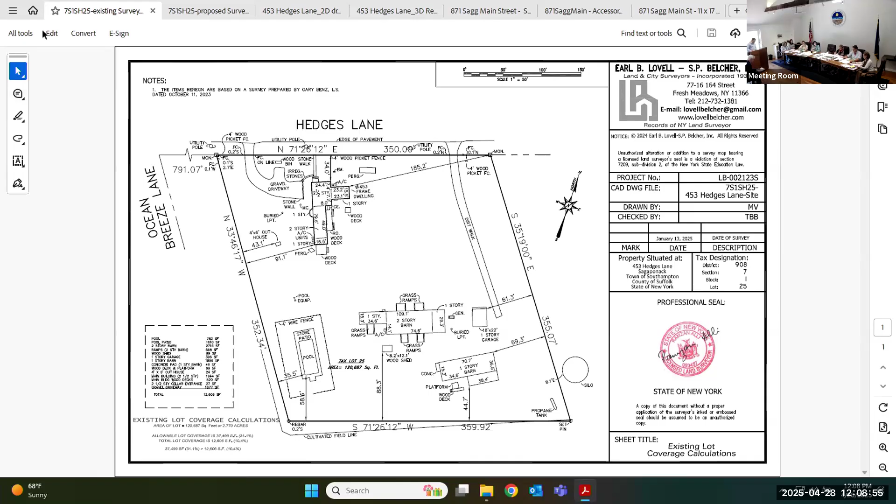Good afternoon, members of the board. My name is Robert Paxton, representing Brian Glasser. As Wayne had mentioned, it's unfortunate he couldn't make it. Brian had mentioned to just go over the lighting analysis from the renovated Greek Revival.

The existing window openings are to remain more or less in the existing structure. On the main house addition, the north front elevation is 15.8%, the south rear elevation is 15.3%, the east left side is 11.1%, and the west right side is 12%, resulting in a total average of 13.55%.

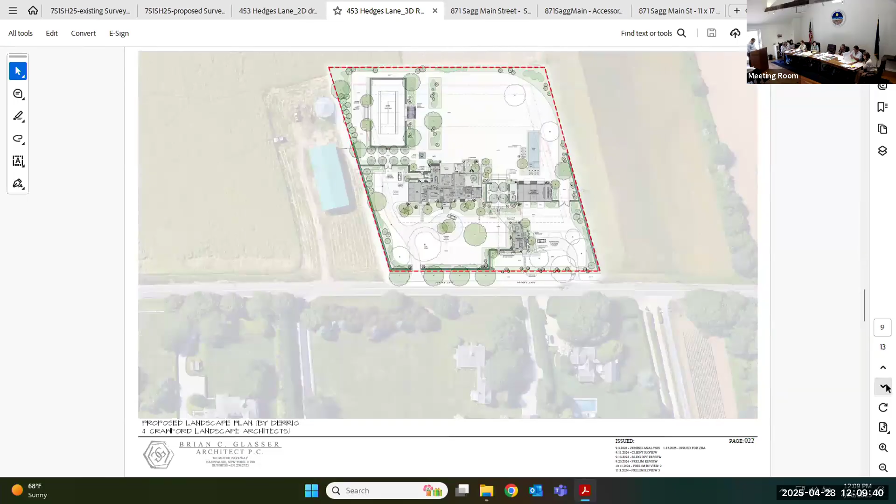On the renovated barn, the relocated barn, the north front elevation is 24%, the south rear elevation is 19.6%, the east left side elevation is 18.1%, and the west right side elevation is 20%, resulting in a total average of 20.43%.

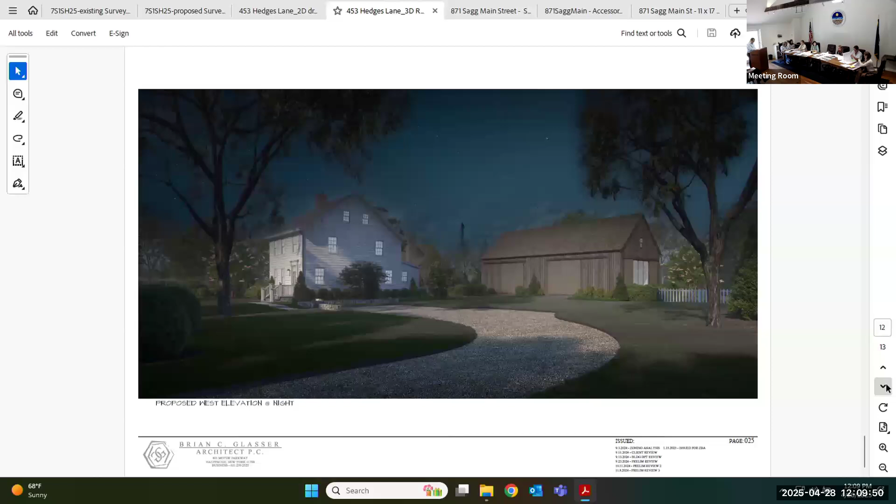And would that include when the barn doors are engaged, or is that maximum finish? That's maximum. Okay, thanks.

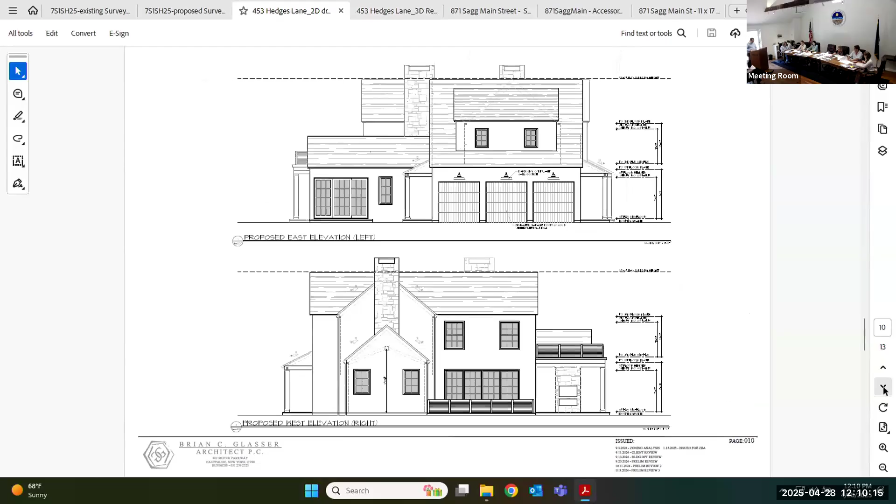Any other questions, madam? Sure. I'm looking at the plan, it looks like the tennis court is aligned with the new house, but when I look at this rendering, it looks off, at a weird angle. Am I crazy? I think the property line angle is sort of a rhomboid, so it's right, sort of the angle. Okay, so that is definitely the way it should look. Yes, great, okay.

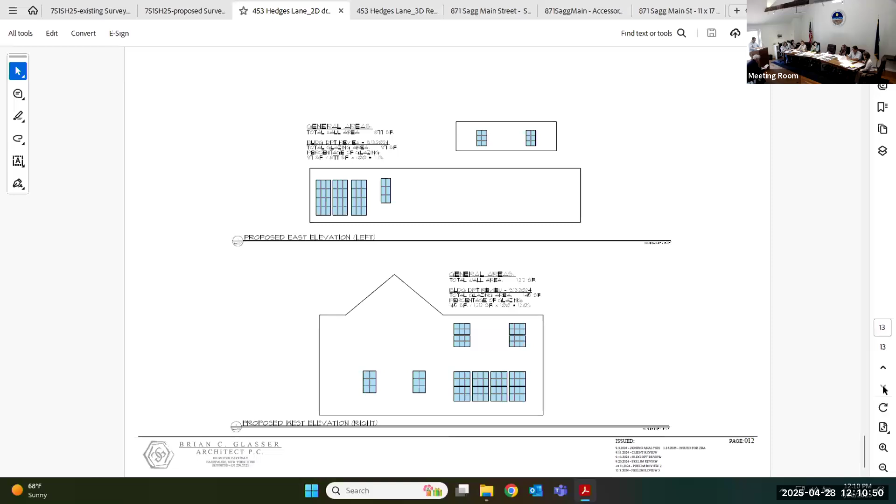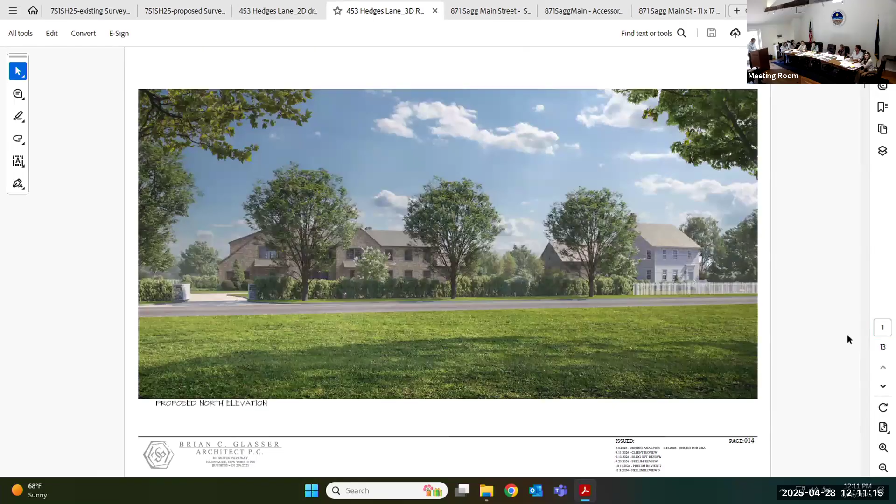Maybe you can summarize the materials for all the documents. So regarding the materials, on the existing Greek revival, there's a brick chimney to remain, pressure treated Alaskan yellow cedar roof, copper gutters and leaders, painted white clapboard to replace the existing, and Marvin Ultimate windows, which will be white. On the existing barn, the pressure treated Alaskan yellow cedar roof, lead coated copper gutters and leaders, board and batten siding to match existing, and Marvin Ultimate windows in suede, which is the color shown on top.

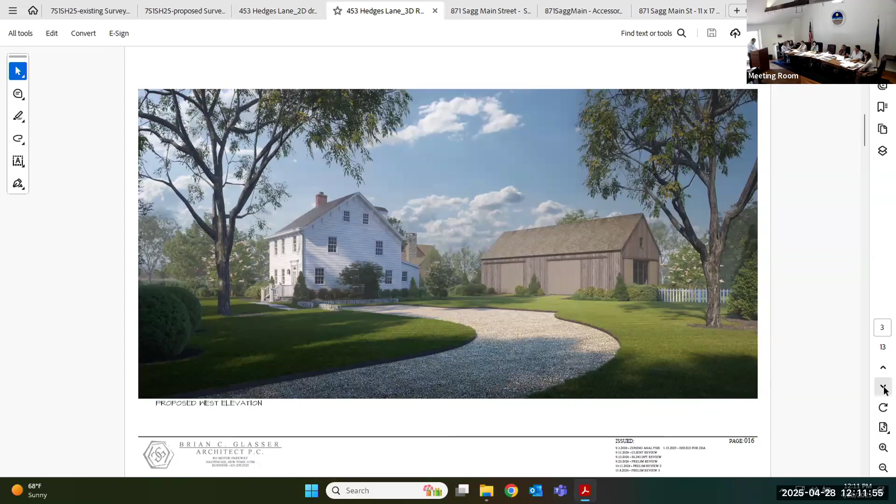On the proposed main house, the addition to the Greek revival, the roof will be pressure treated taper sawn Alaskan yellow cedar with 5.5-inch exposure. The gutters and leaders will be round and half round lead coated copper. Siding will be R&R shingles, Alaskan yellow, 6-inch exposure. The chimney will be Connecticut fieldstone, square and rectangle pattern, with lead coated copper flashing. The windows will be Marvin Ultimate suede, double hung, simulated divided light 6/6.

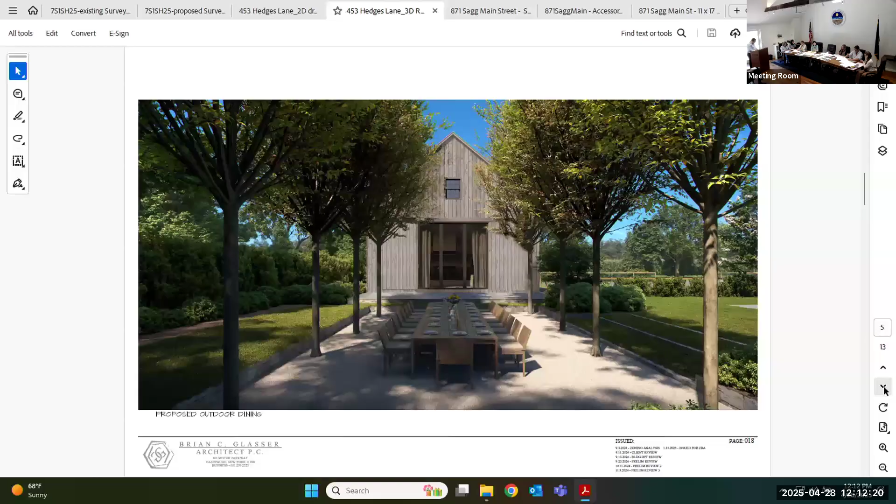The trim will be Alaskan yellow cedar left natural. The columns will be Alaskan yellow cedar left natural as well. The patio will be blue stone with stone risers. The railings will be Ipe, no posts, solid top and rail, with stainless steel cables. The wall sconces will be dark sky compliant. Any questions regarding the materials?

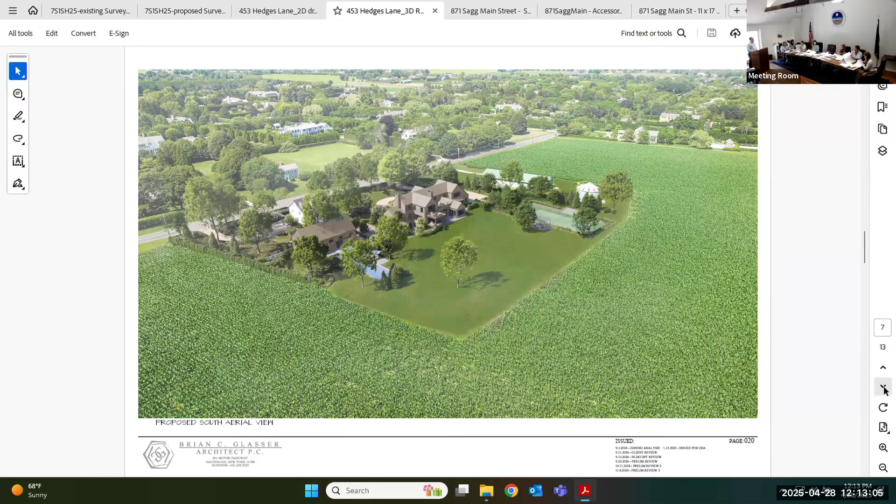Is this basically zero deviation from the last iteration we saw before ZBA? It's the same date, January 13th, right? That's the date on the front. Yeah, they're all dated the same. Yes.

I think it's great. I appreciate you guys taking a collaborative effort with us before ZBA and everything.

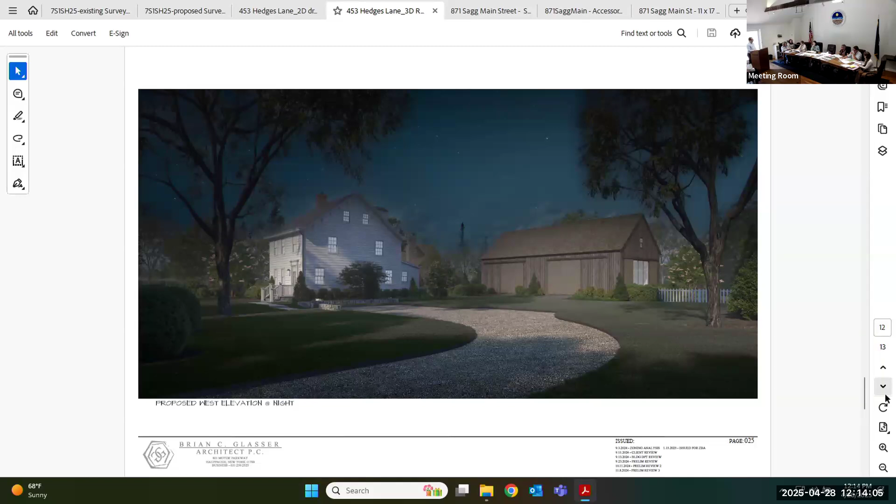What was the last date that we saw this? I believe January 27th. Was that before or after ZBA? ZBA came after, because this says it was issued for ZBA. Right, but they came to you for support before, and then went to ZBA. So we haven't seen it since ZBA. Right, this is your first time seeing it. This is the set that was done for ZBA. Yeah, after your meeting we had to have a public hearing, the whole nine yards.

We got our decision on April 11th. Okay, it started approximately a year ago. We're between that and Sagg Main Street with the same architect.

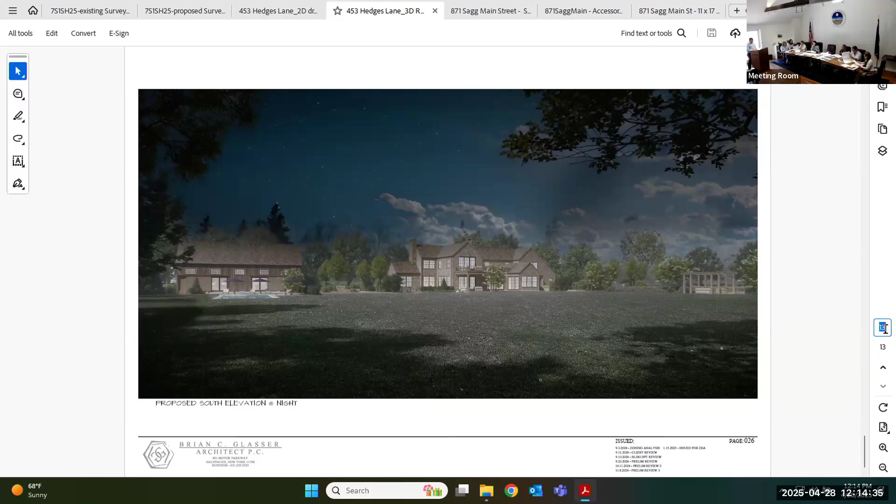I see no problem with it. Recognize it for what we worked on before. Yeah, we did a lot of work to get to this positioning, and to give Megan credit, one of her big ideas got us to this place, and I think it's great, I really think it's beautiful. Thank you. Sounds like a good time to make a motion to vote. Yeah, okay, we have a motion to vote. Second. Okay, approved. Aye. Aye. Thank you. Aye.

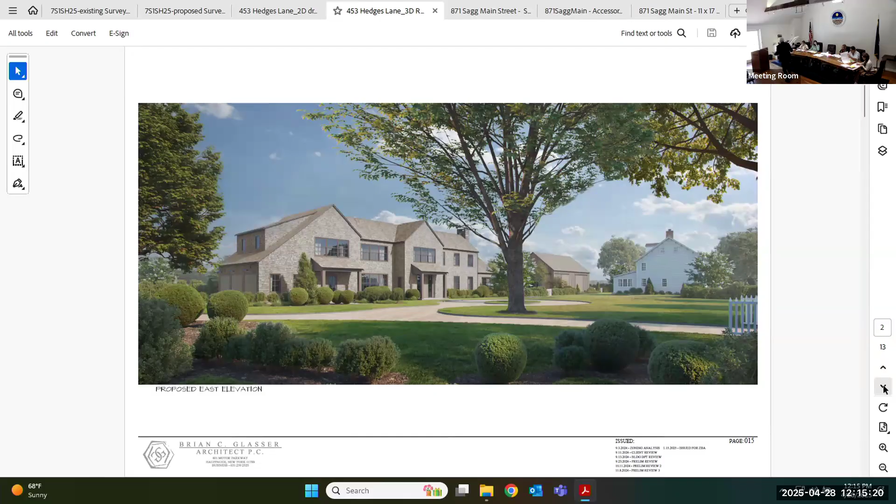Yeah. Yeah. Thank you.

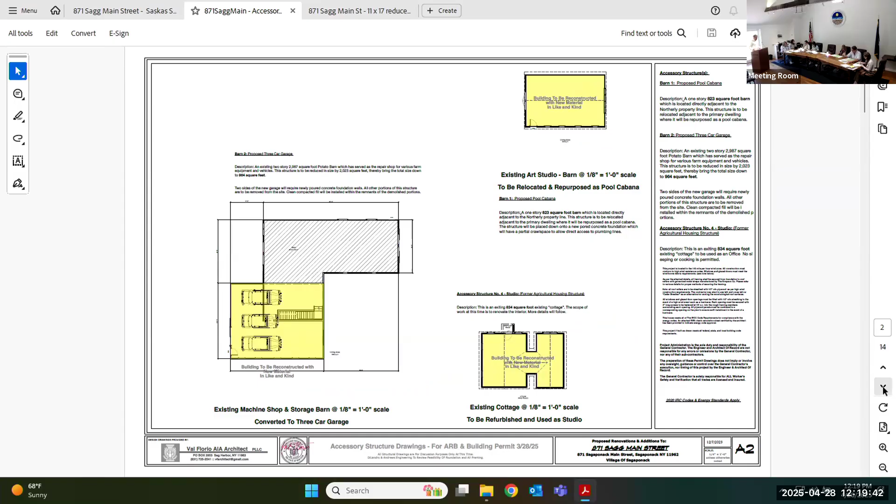The third structure we're asking for is known as the agricultural housing building, labeled number 4, and you're allowed to keep that to be repurposed as an office. It's not a working office, just an office. This is a large family with 6 adult children, and this will serve as a quiet study or a place to work. But this structure does not sit on a full waterproof basement.

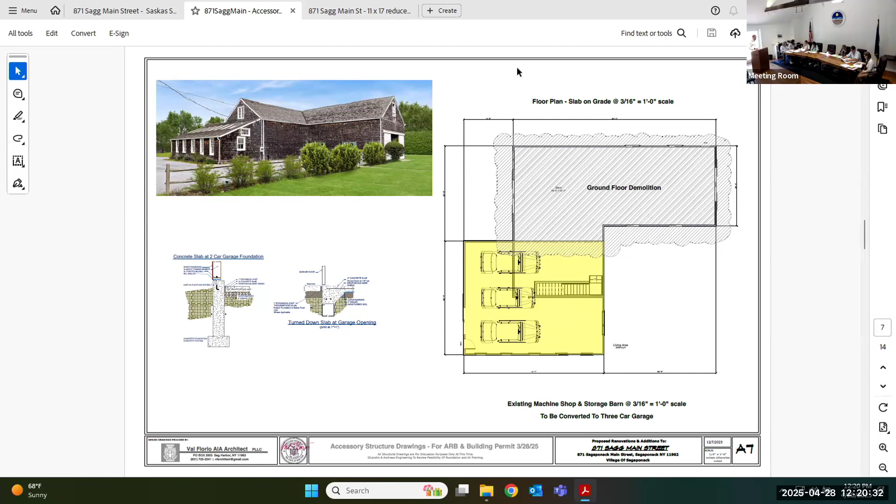The problem with it is not so much the integrity of the wood, but there's mold, and mold is a serious issue in terms of living space. Buildings 1 and 2 are not living space. The pool cabana, yes, you'll be inside. Building 2 is a garage. But building 4, just for health, safety, and welfare of the occupant—mold is highly toxic, and it affects a small percentage of the population.

Not that the board needs to hear this, but I'm thinking of health, safety, and welfare for my client. Eve has respiratory issues where she cannot be in a building with mold, and there are some people so sensitive that even paint can set off a respiratory issue. I've had this before, oddly enough, in Sagaponack. We had a house that was painted and the client was allergic to the chemicals within the paint, so Benjamin Moore sent out scientists to look at it. I hate to digress.

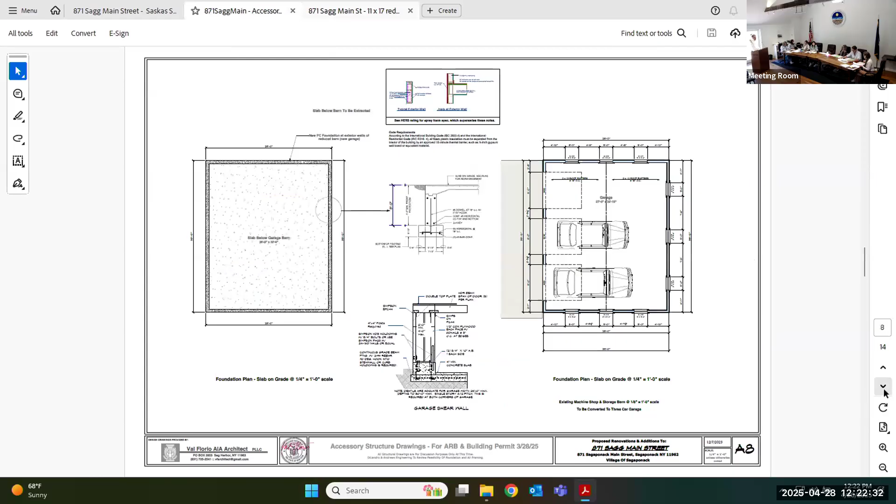Again, I'm coming to you to say everything we're doing would be exactly as approved. Each building, as you thumb through, is a photograph. I've documented the heights, the exact window locations. Nothing being presented today is different than what had been approved, with the exception of the office structure, which is A11 -- the windows within that building were retrofitted.

Wait, the office being number 4? Yes, and it's on this slide in front of us. I don't have any 11. Yeah, I abbreviated the set, so if you would, I'd invite you to look at page 7 -- it's A7, almost the last page.

What this structure is -- you can see the larger of the two peak roofs. There was a shed that must have been dragged to the back at some point and then just connected. The shed doesn't sit on a foundation, it's on a slab. And these windows, which you see here, have no divisions, which is inconsistent with a historically correct house of this period. A lot of these structures were built circa -- the main house is 1905.

This agricultural building was not too long after. If the board is aware, this is a working farm and it's adjacent to one of the oldest farms in Sagaponack that dates back to the 1600s.

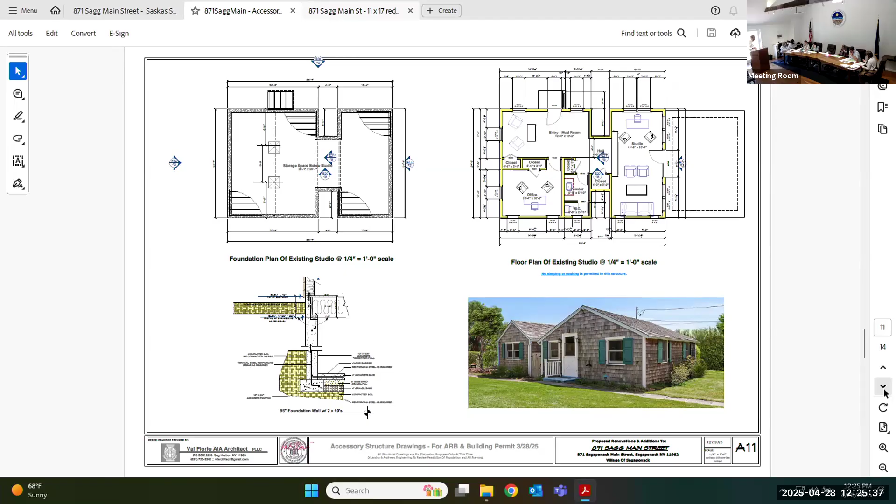So that's the story in terms of the three buildings, and no changes from the approval which this board granted. An unfortunate issue, I'm sorry. And I appreciate you're trying to do exactly the same because it's so perfect the way that it is.

So thank you. Thank you, Megan.

Would the -- as far as recreating these in exact like kind, from our standpoint aesthetically it looks the same, but John, would these have to be condemned in order to rebuild them? No, what I can tell you is that the garage section, the barn, cannot be turned into what we approve. The structure is too compromised, too cobbled together -- it simply can't be done without doing it over. The mold issue, I have not seen in the back building, but I could smell it when I went in there, and it is a health hazard.

Yeah. Did my house in.

Might add, this is a growing issue across the country in terms of historic preservation. I am a preservationist -- I served on ARB in Sag Harbor for many years, but there comes a point of diminishing returns on a 200 to 250-year-old house. It's like, when do you draw the line in keeping a structure? Because the house begins to die the day it's born, and unless you keep the water out, the wood will eventually degrade.

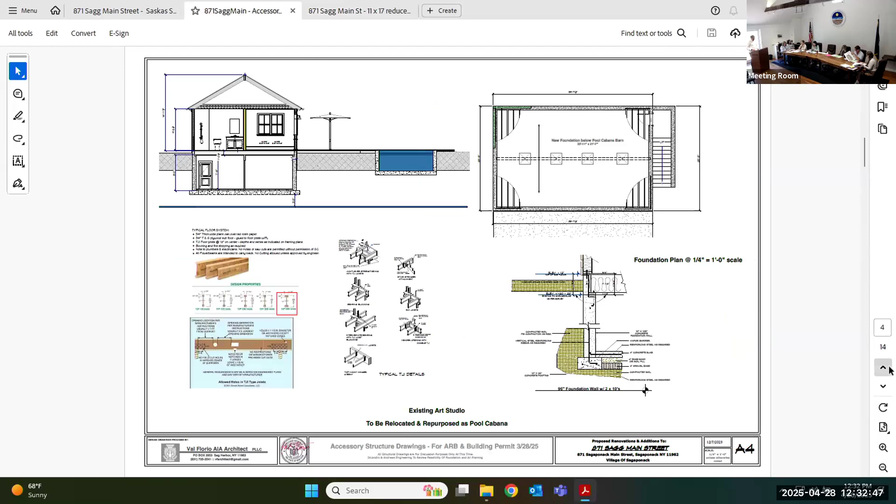I haven't seen this before, I'm just looking at the pool cabana. So it's structure number 1? Yes. And the drawing A3 shows a new pool, right? Correct. The building labeled on the cover sheet number 1, yes, is to be relocated in proximity to a brand new swimming pool. It's coming closer to the main house.

So there'd be two pools on the side? No, the pool's gone. The existing pool is gone. Oh, so it would just slide closer to the house? That's right. Okay, I understand. Yeah, the previous pool had a leak. A lot of these older pools only have about 6 to 8 inch thick walls, and it had a slow leak, and it's also in a location where the addition is planned.

So this would slide down to here? It is, it's coming closer, approximately to the line of that fence for the road.

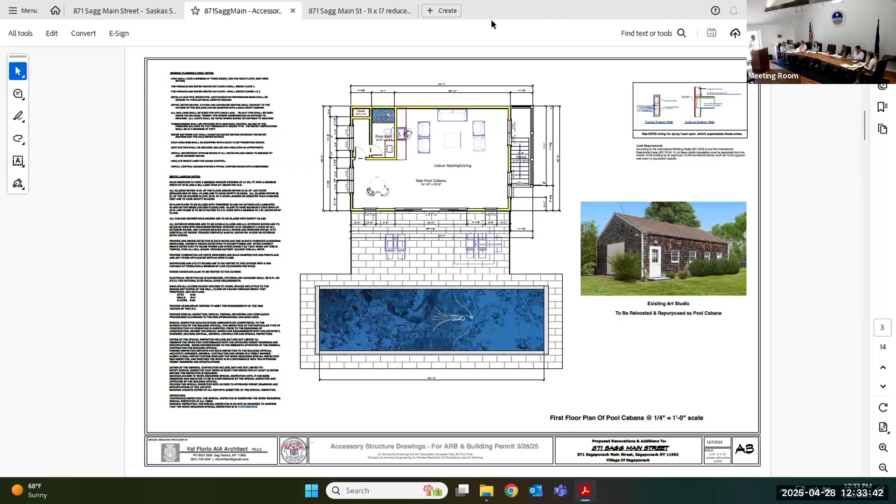I'm sorry, you weren't part of those discussions, but I came to the board to ask to keep these buildings so that we kept the look and feel. They contribute to the character of the neighborhood in Sagaponack, and that I felt was important. We asked for special relief so that we're not, by rights, taking down buildings. I just wanted to clarify that.

So, I think not identifying exactly how you're reducing barn number 3, or where exactly you're moving structure number 1, everything piecemeal seems visually good in what you said.

But we're not getting a fully complete, holistic site plan look. It's on the survey, which I guess is a little bit of what I was just thinking about. I'm just curious, I don't think I was here when we did this.

The historic structure and that reduction in size, what is that based on? Was it a goodwill effort to show the board we weren't asking for more square footage? The existing barn, barn number 3, which is the largest one on the property.

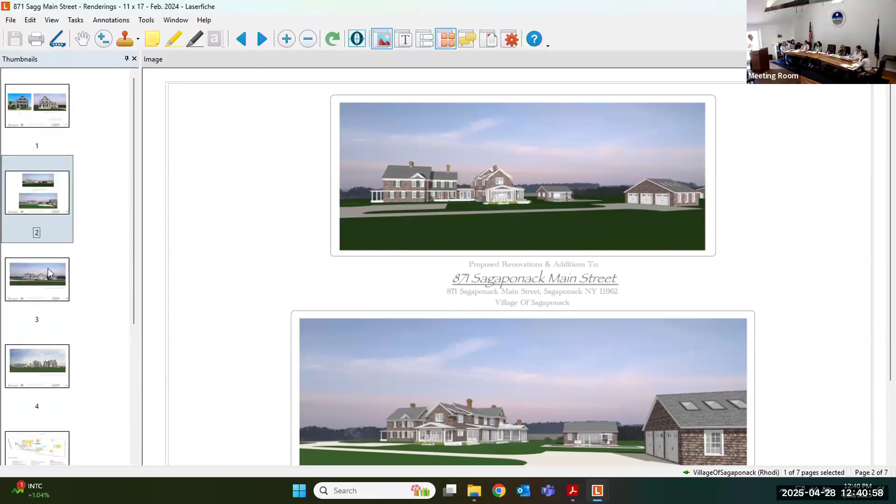Your board has the duty, and if it comes before you, you can override the zoning board in terms of your determination. You can say, we feel, based on your findings, that will it set a precedent in a negative way that people in the future can follow that pathway. However, since the zoning board was so enthusiastic, as well as this board, to answer your question, no, you cannot. If someone came with a historic house and said, we're gonna cut the thing in half, you have the duty to say, you've purchased this historic home that's contributing to the neighborhood. This thing cannot be done or taken apart to that extent.

It would largely be a line of sight issue. Even that would... I guess that's why I'm just asking in context of that.

But I think the distinction here is that these are accessory buildings versus a house. Also, one of the factors, when the zoning board has a five-part factor test, they talk about quality of life, is it a hardship that the applicant brought upon themselves? There are many factors you could look at, but the fact is that the zoning board found this favorable in that the mass of this building, as it presents itself, is the same presentation to the street, so there was no adverse effect.

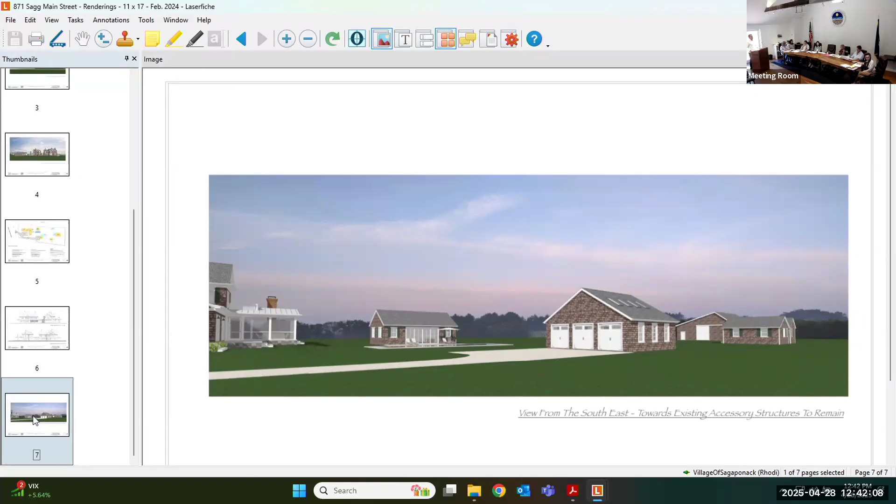But you have a lot of authority, much more than... I just wanna understand, again, apologies for not knowing the history of it. Can I see the site plan again? The site plan is on page 1 of this set here, and you can back it up and see what we approved.

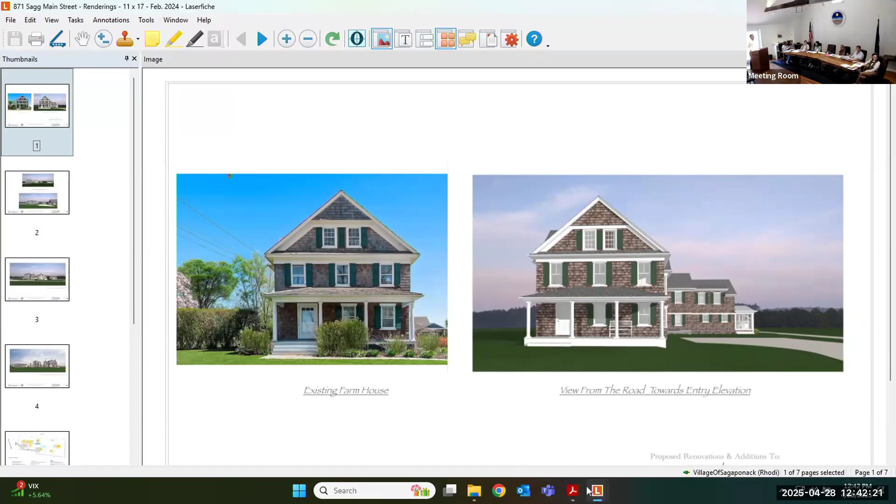This may be... might not have been here. I just thought I was crazy because I didn't remember it, but probably when I wasn't here. So, but we made a great effort. Again, the project was presented to you under the spirit of preservation, and I think that in itself is why the zoning board found merit with it, as well as the Board of Historic Preservation and Architectural Review.

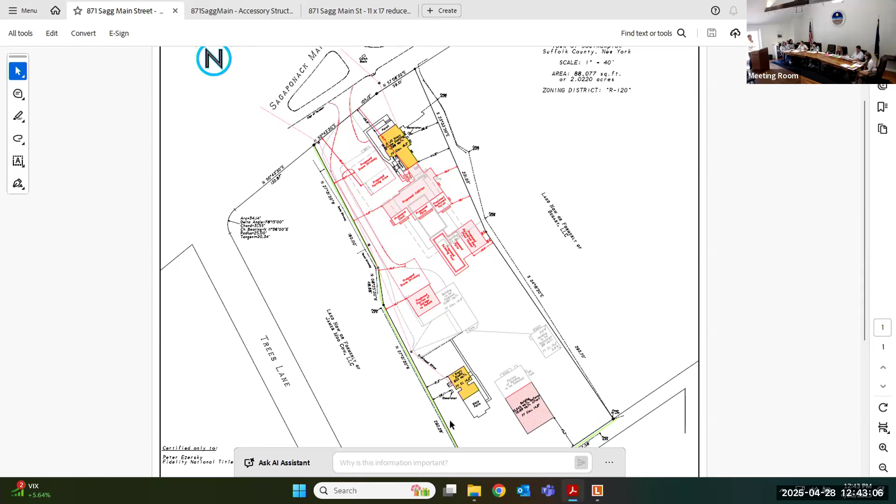So Tony, what are we signing off on today? Number 4, basically. So the last one wants to reconstruct it, it's full of mold, he wants to rebuild it. I'm for not having mold, so that's what I say. No mold, nobody wants that.

Given that, do we feel comfortable with him not specifying the super perfection cedar shake shingles and stuff? They are specified on the plans. So everything is in kind with what we've already approved? Correct, there's no change.

These buildings, whether they had been renovated, as Megan pointed out, versus brand new, would be presented with the same exact result. It's just that one of them, it's the skeleton of the building, which is gonna last much longer.

It's gonna look so beautiful. Thank you, I'm excited to see. Thank you, thank you.